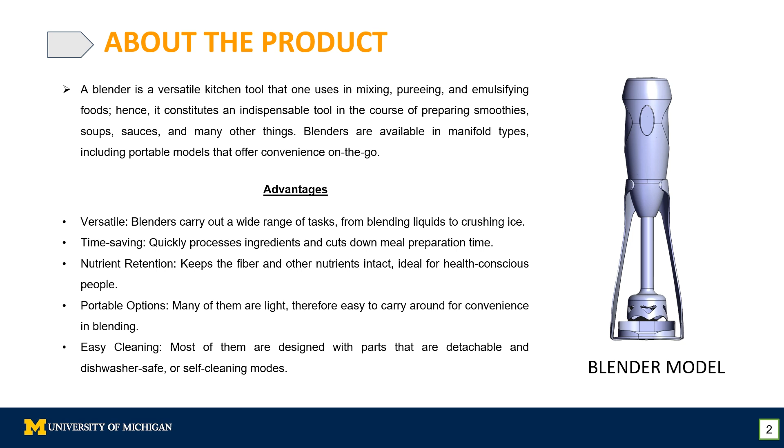Our focus has been to analyze the product's design, identify inefficiencies, and propose practical improvements to enhance manufacturability, assembly, and cost effectiveness. A blender is a versatile kitchen tool used for blending, pureeing, and emulsifying. Its advantages include time saving, nutrient retention, portability, and ease of cleaning, making it indispensable for health conscious and busy users.

Our blender targets amateur fitness enthusiasts and busy individuals seeking quick meal preparation. It also caters to home users blending smoothies, soups, and sauces. Annual production exceeds 100,000 units, scaling to meet demand.

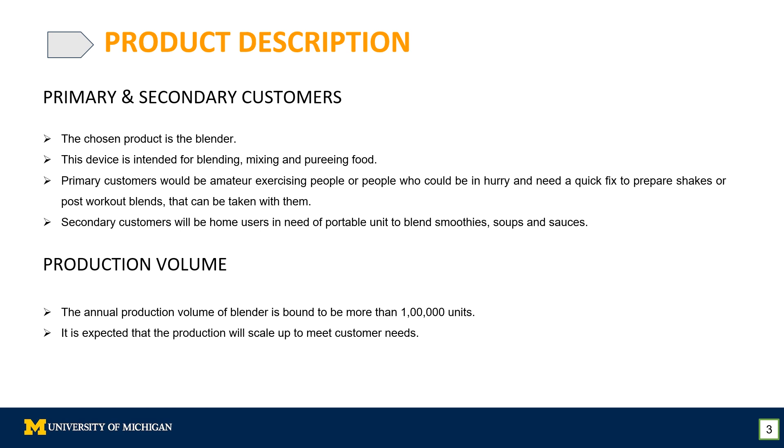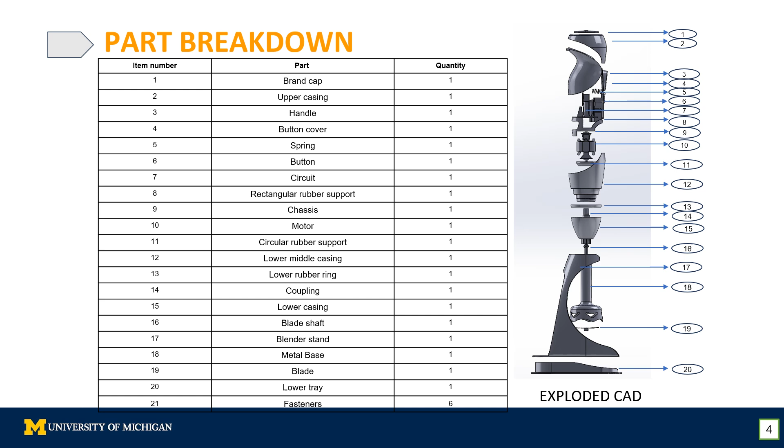The blender consists of 21 components including casing, motor, button assembly, and blade shaft. This breakdown informed our redesign efforts, focusing on parts impacting assembly time and cost the most. The FAST diagram identifies key functions of the blender, showing areas for improvement. For example, the button assembly and the blade shaft emerged as critical components for redesign, balancing functionality and manufacturability.

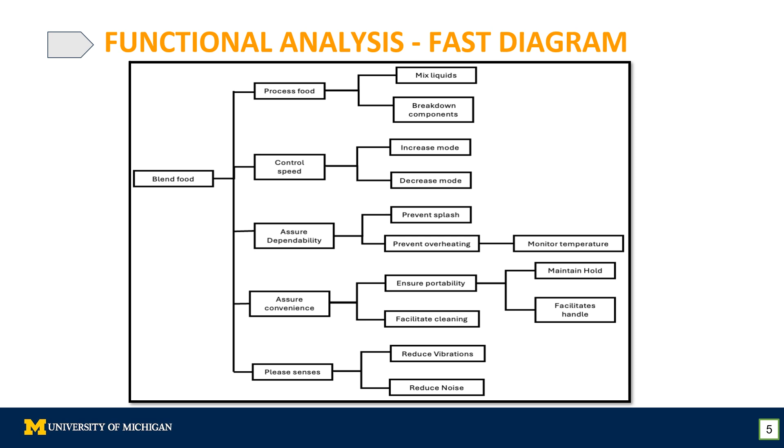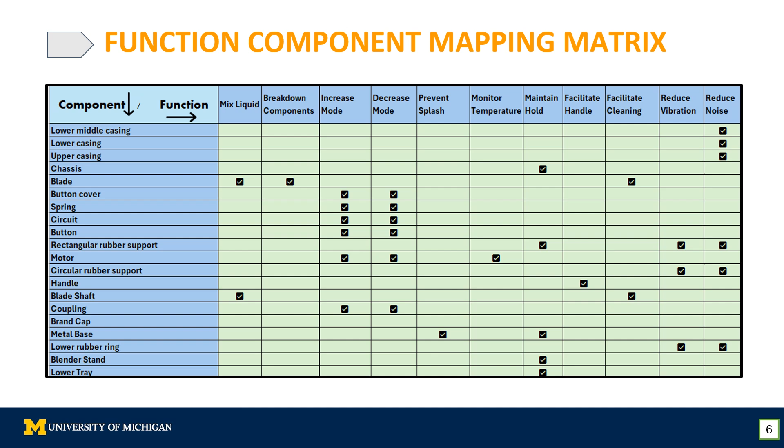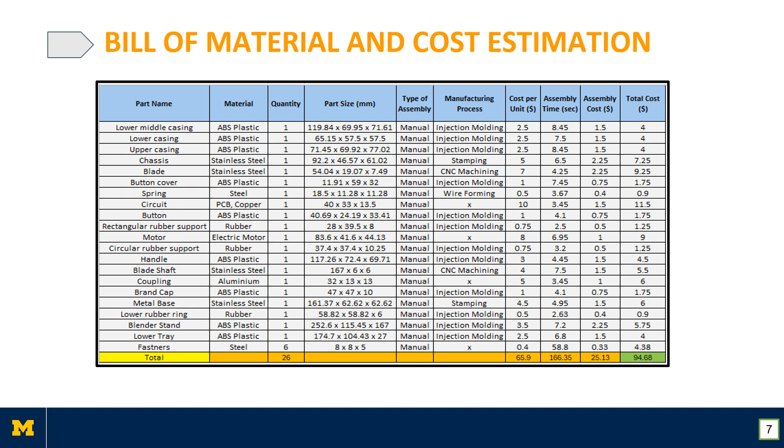The function component mapping matrix helps align components with their functional importance. High priority components such as the blade, button assembly, and blade shaft were targeted for redesign to enhance efficiency. Cost analysis of materials revealed opportunities for cost reduction. By redesigning components like the button assembly and blade shaft, we achieved significant material and assembly cost savings.

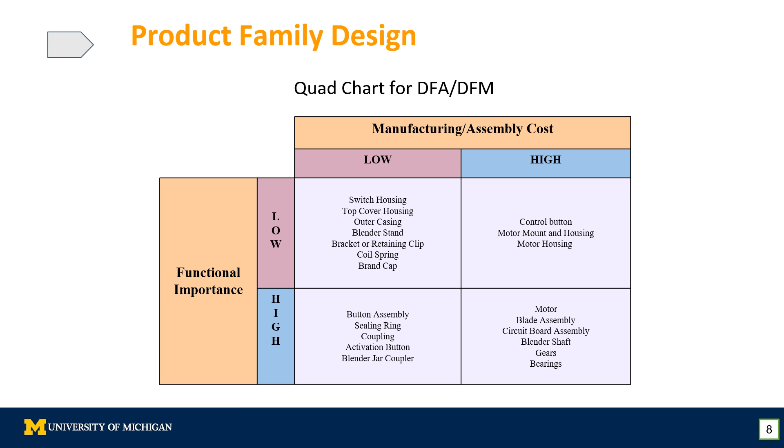The quad chart for DFM shows parts categorized by functional importance and manufacturing or assembly cost. Parts like the button assembly and outer casing stood out as ideal candidates for improvement. Family design uses a common platform of the casing assembly, blade shaft, and button assembly. This ensures manufacturing efficiency while modular customization meets specific customer needs, achieving our goal of balancing flexibility and cost effectiveness.

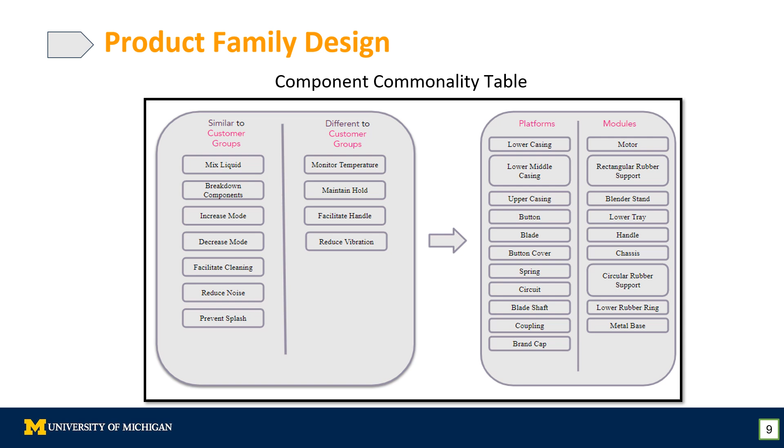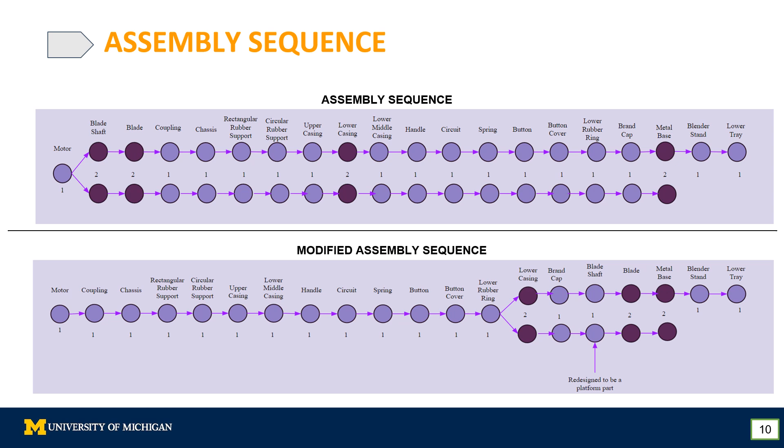For platform selection, we have chosen the lower casing, upper casing, and handle to optimize the structural foundation. For module selection, we have focused on the blade and blade shaft to streamline functionality. These targeted changes aim to simplify the assembly process and enhance efficiency.

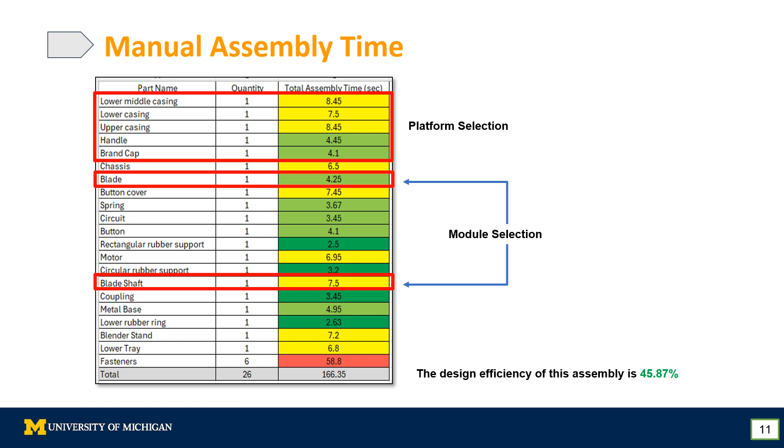This slide represents the functional component matrix showing the role of each component in the assembly. The lower and upper casings, lower middle casing, and handle have been redesigned to reduce noise and facilitate handling, enhancing performance while simplifying assembly. Additionally, the blade and blade shaft share the function of facilitating cleaning. Through the redesign, we have reduced the number of parts while maintaining functionality, resulting in a more streamlined and efficient assembly process.

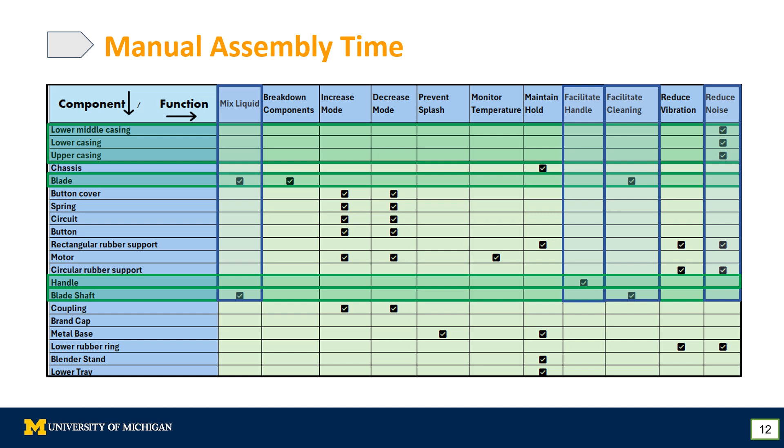The new redesigned parts have reduced the manual assembly time from 166.35 seconds to 132.7 seconds, improving efficiency by 12.32%. This significant reduction is primarily due to the elimination of two fasteners, the lower middle casing, and the handle, which streamlines the assembly process and boosts overall productivity.

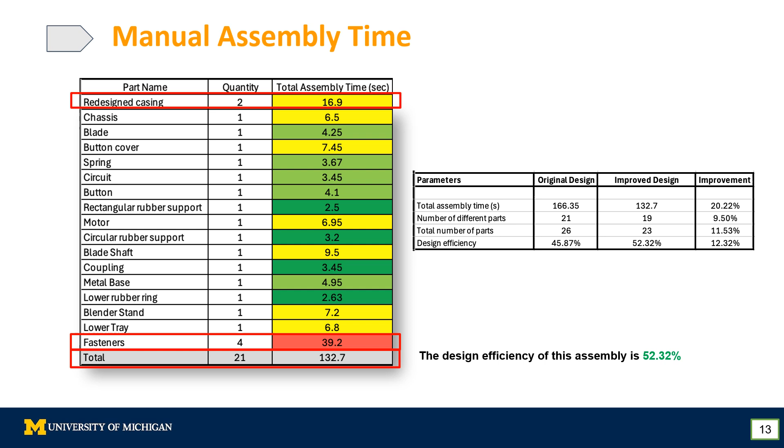The table on the right highlights the differences between the original and the new design, demonstrating how these changes led to a more efficient and cost-effective assembly process.

In this redesign, several DFA principles were applied to improve assembly efficiency. Two fasteners were eliminated, reducing assembly time and complexity. The handle and lower middle casing were eliminated, reducing the number of parts.

Snap fit connections were introduced for the casing, simplifying attachment. Symmetry was achieved in the upper and lower casing, improving handling. Hand and tool access was optimized for the blade and blade shaft, enhancing ease of assembly.

While this requires an initial investment, the overall production costs are reduced over time due to the improved assembly efficiency, making the process more cost effective in the long run.

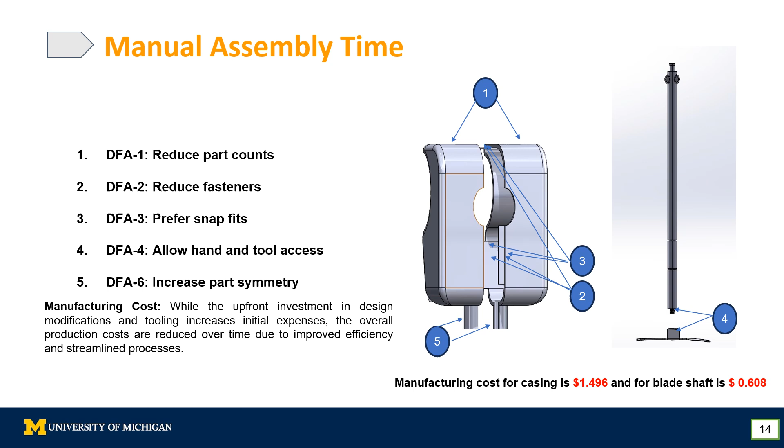Talking about automated assembly, integrating the button cover and the spring into a single assembly makes sense based on the functional component mapping matrix, for the following reasons. Integrating those components into a single assembly offers significant benefits for automated assembly.

These parts share multiple functional roles, making integration an ideal way to simplify the assembly process. By reducing the number of components, we streamline the design, minimize assembly complexity, and improve throughput, ultimately driving down costs. This approach aligns perfectly with design for assembly principles, which aim to optimize designs for efficient automation.

The result is a more reliable process with fewer errors, lower inventory needs, and improved overall production efficiency, making integration a smart and cost-effective solution.

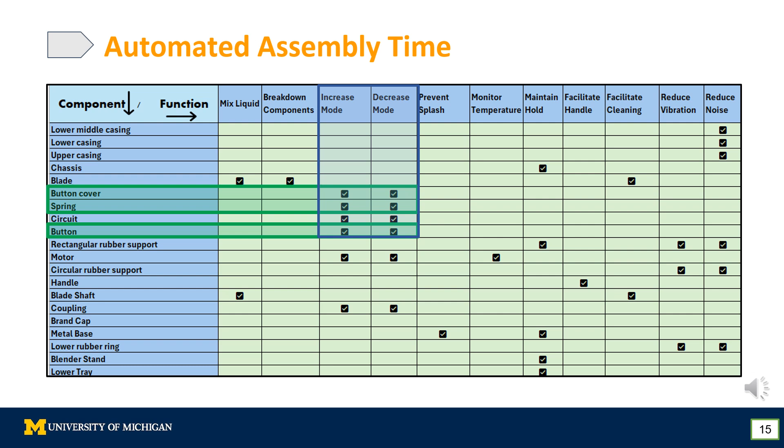Before integrating the button cover and the spring, the handling and insertion cost per unit was $45.845.

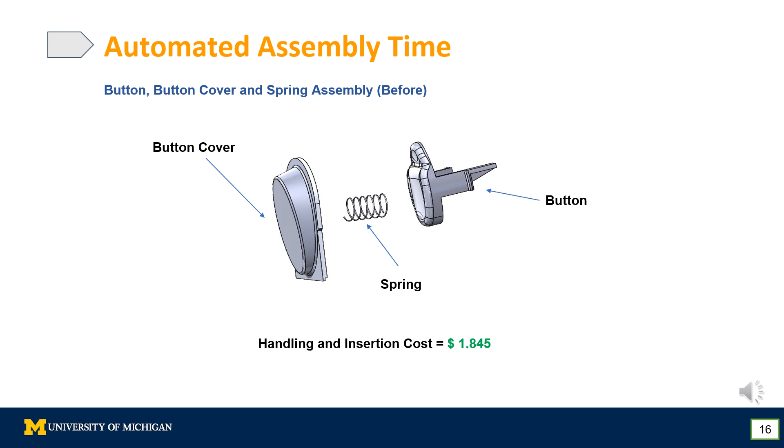By combining these components into a single assembly, we significantly reduce handling time and insertion complexity, as fewer components mean fewer operations for the automated systems. This integration streamlines the design, minimizes assembly steps, and supports faster throughput, aligning with design for assembly principles.

The result is a noticeable reduction in costs and more efficient, error-proof processes, offering a strong return on investment for automation. After the integration, the cost has been reduced to $0.4032, representing a significant efficiency improvement with no major changes in the product functionality.

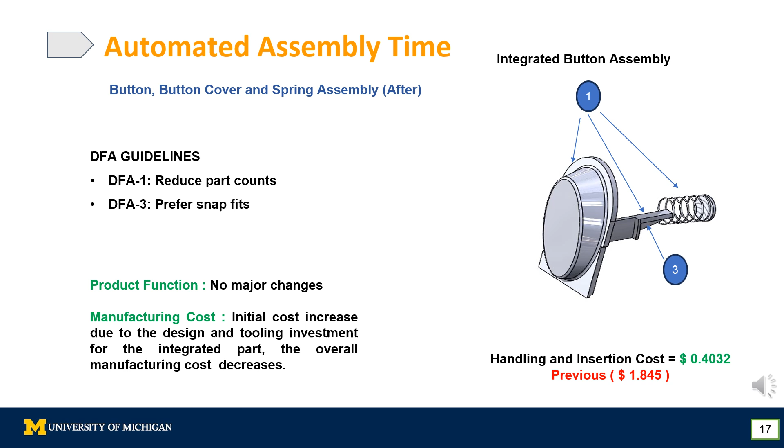While the initial manufacturing cost increased due to design and tooling investment for the integrated part, the overall manufacturing cost decreased over time. This cost reduction is driven by fewer components, simplified assembly, and improved automation efficiency, making the integration a cost-effective and functionally sound solution.

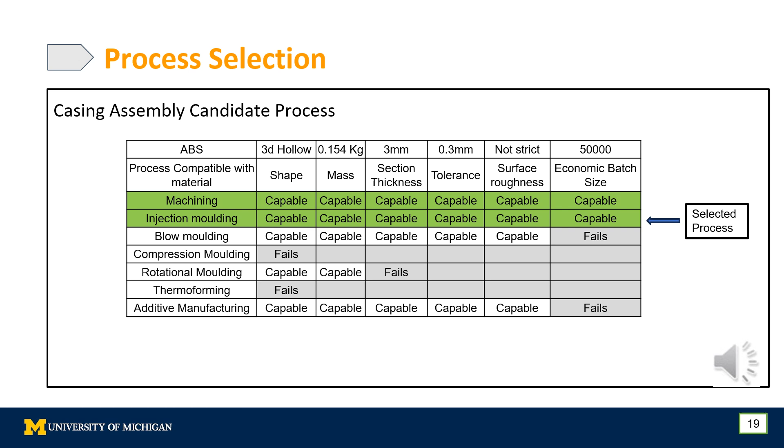Let's delve into the DfM Pro recommendations for using injection molding on the initial components we assessed for redesign to cut costs and reduce the number of parts. These components are part of manual assembly, which include the upper casing, middle casing, lower casing, and handle.

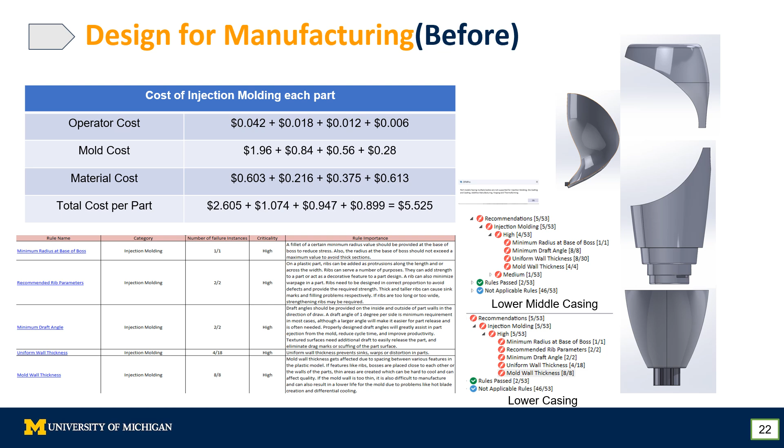DfM Pro software recommends enhancements such as minimum radius at the base of the boss, minimum draft angle, uniform wall thickness, mold wall thickness, and rib parameters. By implementing these suggestions, the total manufacturing cost for these parts came to $5.525.

By following the DfM Pro recommendations, these are the redesigned parts where we have streamlined the casing into just two components. We adhere to the DfM Pro recommendations for injection molding, resulting in a significant cost reduction compared to the original parts. The redesigned casing features fewer snap fits and a reduced number of parts, which translates to decreased assembly time and improved tool accessibility.

Consequently, the manufacturing cost has been reduced to $1.496.

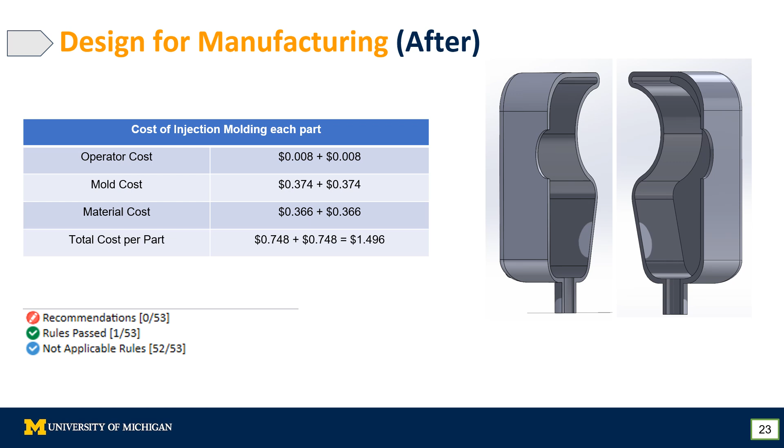Additionally, we have evaluated another component for manual assembly, the blade shaft. The DfM Pro recommendations for this part include rib parameters, minimum draft angle, and mold wall thickness.

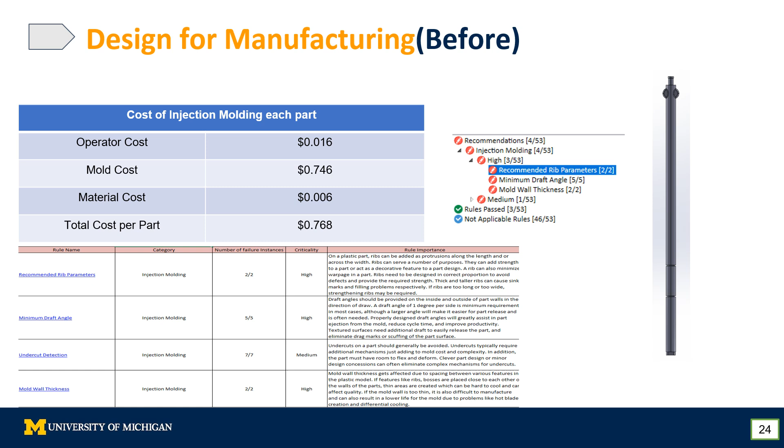Following these suggestions, the manufacturing cost for the blade shaft is estimated to be $0.768. Following the DfM Pro recommendations, we have added threading at the end of the blade shaft with a thread size of metric 1.2 by 0.25. This is where the blade can directly fix into it without the need of any extra bolts or screws.

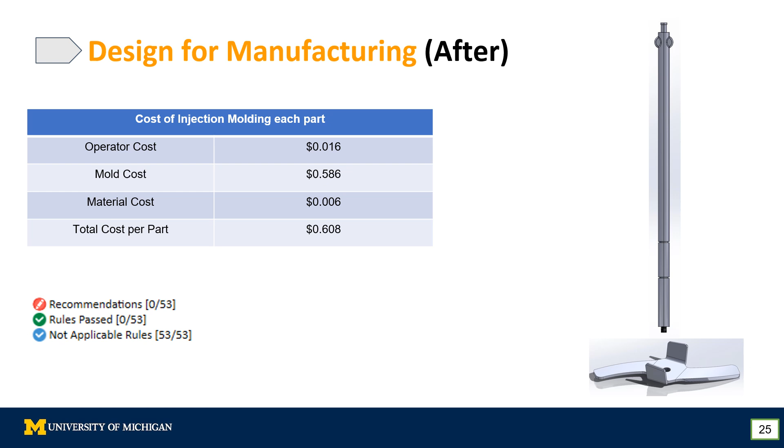By this method, we have reduced the assembly time and reduced the cost for the assembly, where it is coming to be $0.608.

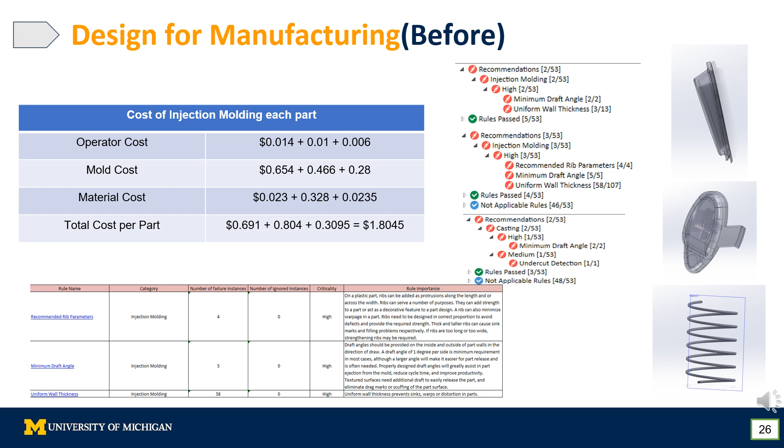The redesign was guided by DfM Pro recommendations, including ensuring a minimum draft angle, maintaining uniform wall thickness, optimizing rib parameters, and minimizing undercuts. These improvements help streamline manufacturing while reducing costs.

We integrated the button functionality into the back of the spring and redesigned the button cover to optimize its features. While the redesign aligns with most of the DfM Pro recommendations, we were unable to completely eliminate two minimum draft angles and undercut detections. However, we successfully addressed the most critical and high priority recommendations for the button cover.

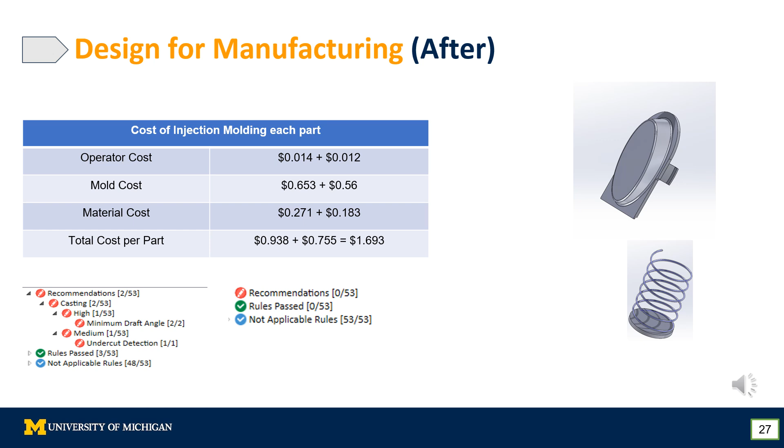This redesign has also reduced the manufacturing cost to $1.69.

To enrich customer experience and address environmental concerns, we propose a product service system. This approach integrates product functionality with tailored services such as repair and upgrade programs, take-back initiatives for recycling and refurbishment, and subscription-based services for part replacement and maintenance.

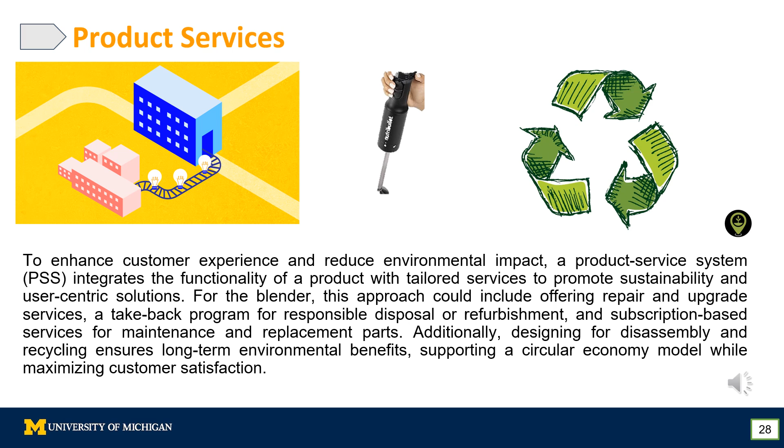Designing for ease of disassembly and recyclability promotes sustainability and aligns with a circular economy, reducing waste while maximizing customer satisfaction and product longevity.

Thus, the redesign of the blender focuses on achieving customer convenience, sustainability, and efficient manufacturing by adopting modular designs. We reduce manufacturing cost and assembly complexities while enhancing functionality and repairability through sustainable practices such as material optimization and ease of assembly. The product supports eco-friendly solutions and meets current environmental expectations.